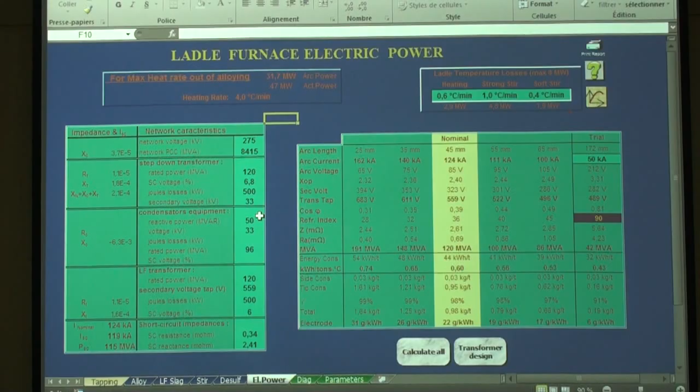Okay. So you have got the point, yeah? We put 4 degrees per minute, and then we get the arc power. Yeah? According to the formula, heat rate plus temperature losses, times tons, times the kilowatt hours per degree and per ton, and divided by the arc efficiency.

And from the arc power to the active power, we have it from the nominal values, but in this case it's not typical because we have just allowed 45 millimeter arc length from the slag, so it's too slow. So usually 47 is too much, yeah? Because with 120 kiloamps, the ohm losses and the voltage drop are too high.

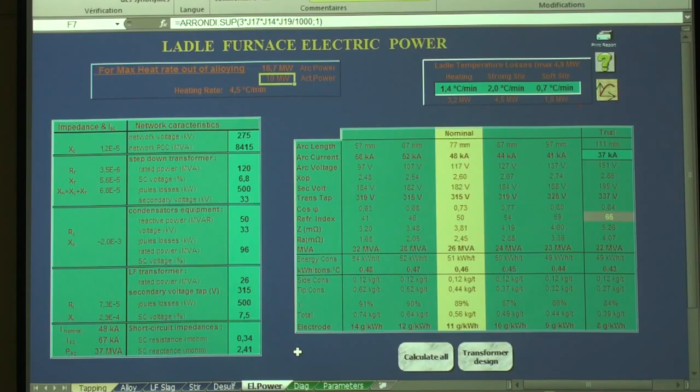How about sulfur? Sulfur is calculated here. This is 6 ppm? No, this is in percent, so it's 60 ppm, I guess, huh? If we want the desulfurization under 10 ppm, you have to start with the lower. You cannot tap at 30, yeah? Okay.

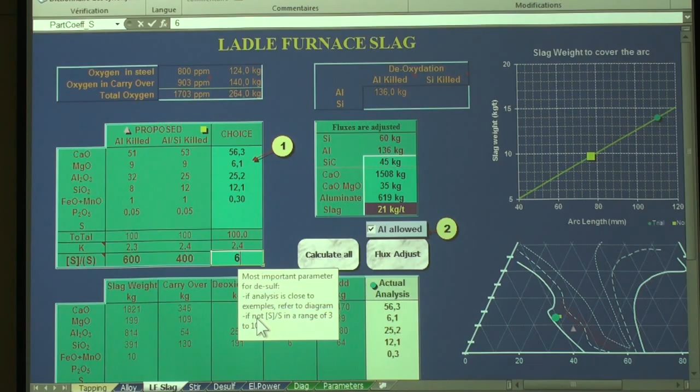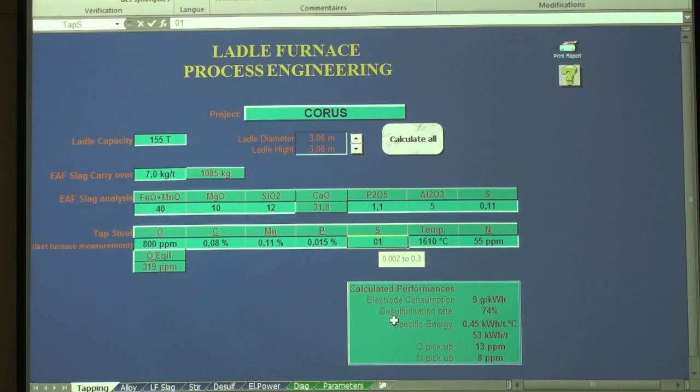And we can still increase the desulfurization. Maybe the slag. We can have a better partition coefficient. It's difficult to get down. 30, we still have 30 ppm. But we have here already 74%. Let's say the maximum we can achieve is 80% desulfurization. So you have to decrease the tapping sulfur. But below is difficult to be so precise. That's right.

So, I mean, the desulfurization rate is calculated here. And this you can find in the literature. Okay, then we'll try it next time.

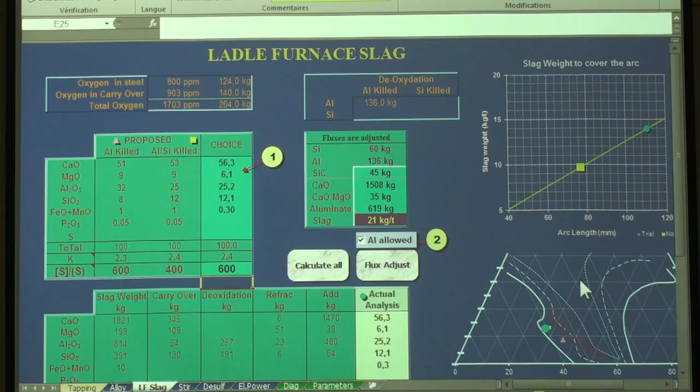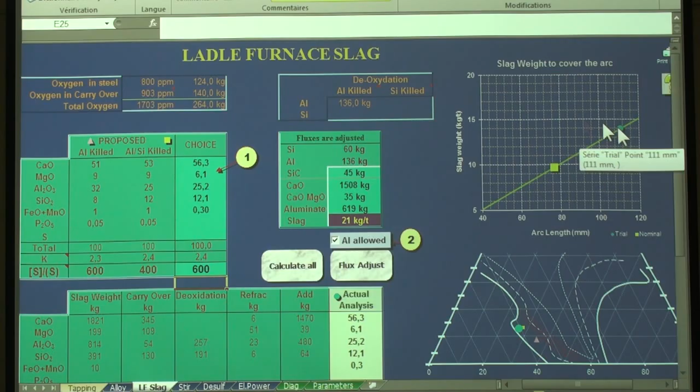The same formula everywhere. So as well, we have quite a lot of slag, so it's helping the desulfurization. It's more than about 100 millimeter thickness of the slag when we decrease the sulfurization ratio. We are 110, yeah? 110 millimeter slag. Yeah, it is a property like CaO plus.

So target temperature is the liquidus plus the superheating, and the superheating is a parameter. This is required by the caster. And of course, this is designed for the standard, let's say, ladle in circulation. If you have a new ladle, it should be higher. As I say, the temperature drop during tapping is 60 degrees C. This is also a parameter.

40 or 50? 60? 40. Yeah, this is worst case. Okay. It's a small size. Maybe.

And here you have the composition of all the fluxes and alloys. The pitch circle diameter is calculated. It's given? No, pitch circle diameter 658 millimeter. It's calculated from this electrode diameter.

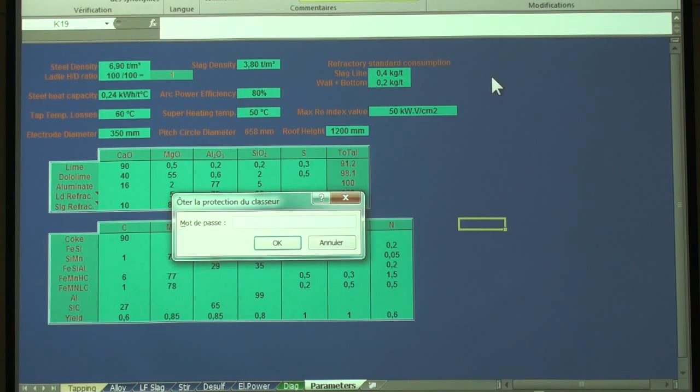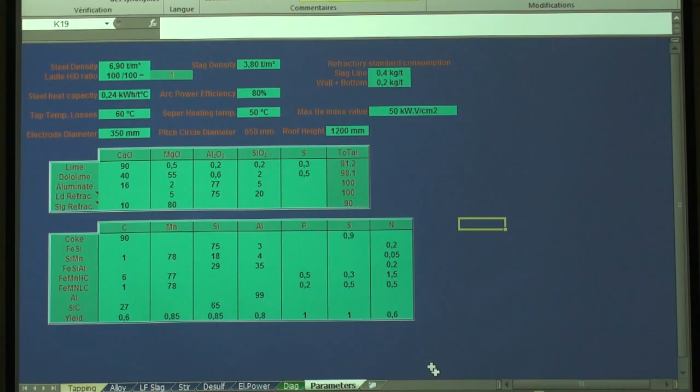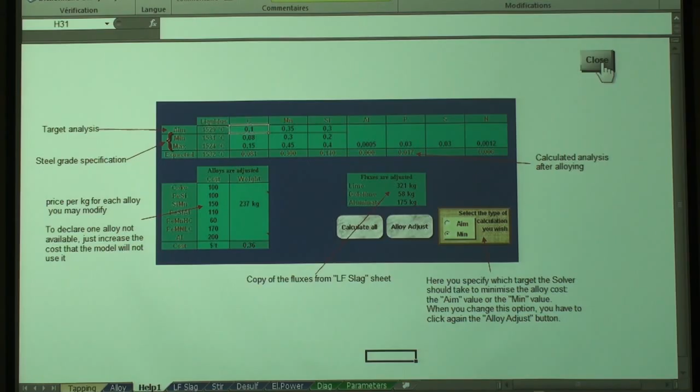So each time you have a help data sheet, then you can have some explanation. Yeah. For all of them. See, EAF model. Then you have the process diagram.

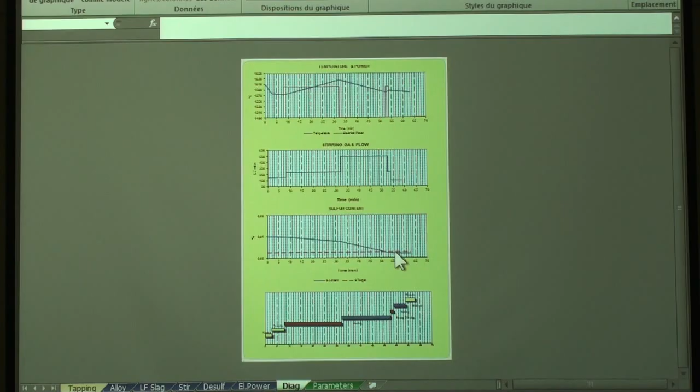With the temperature evolution, the power on time here, the stirring flow rate, with the tapping, heating, desulfurization, heating and soft stirring. The sulfur content, and the schedule. I can increase. You can see better, and the schedule.

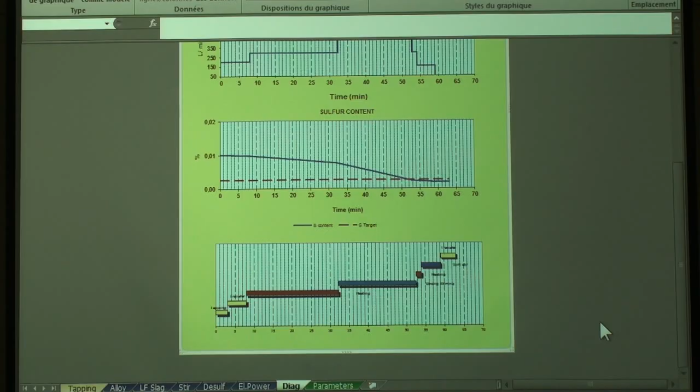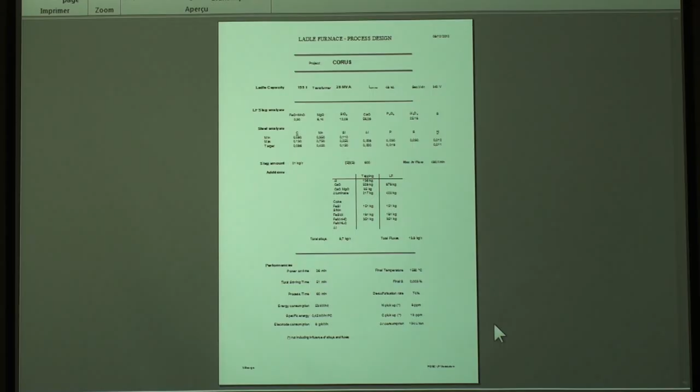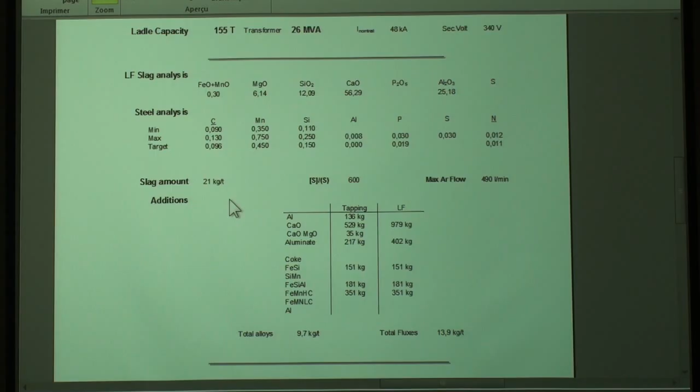And if you want to have the report, you have here all the data, the main figures. With the alloys during tapping and LF. And the performance. You see, I even calculate the nitrogen pickup and the carbon pickup.

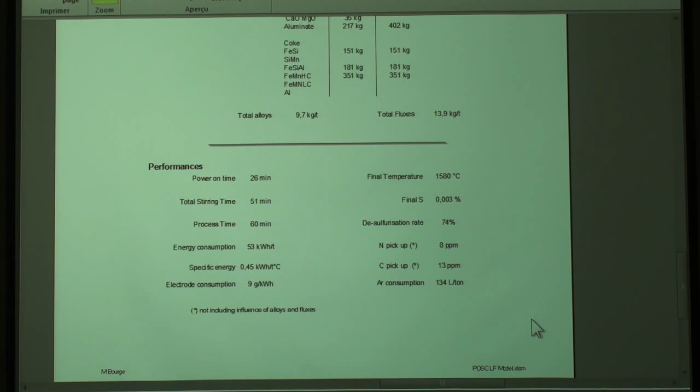Degree per minute. It depends on the ladle size, right? Yes. So also let us have some data for that one. But it's not calculated, yeah. Yes, yes, I know that. But you have experience, your own experience.

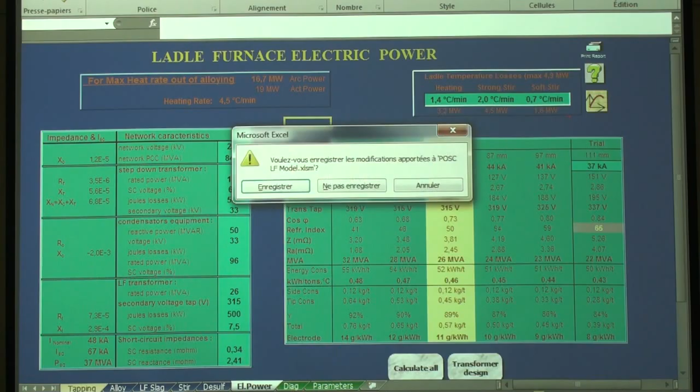Okay, let's go into the EAF heat profile. EAF heat profile. What? Earth? Yes, profile. You have some section of the heat. EAF profile. Yes. Process diagram. What is heat profile? No, I don't have. This is Mr. Ehle's specialty. Yeah, detailed things we will learn from him, but you have it.

Pre-study before the specialist. No. I prefer to leave it to Mr. Ehle, definitely. Really. So, but, yeah. You just have to wait until January, yeah? It's not a long time. No, we have one more problem. In my schedule, I have to report to my boss. I report briefly, so please explain it briefly. And then Mr. Ehle comes here. Oh, it's your first time, we'll say.

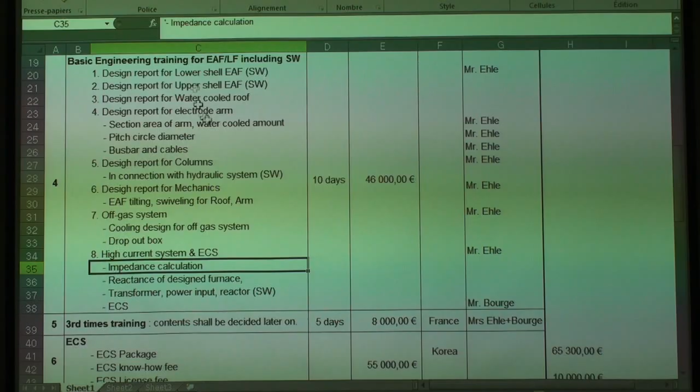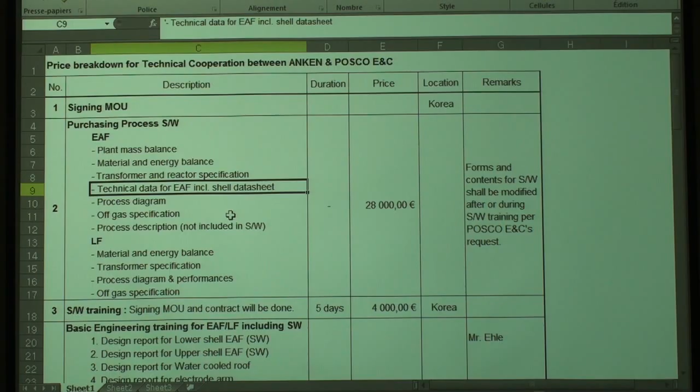I report to my boss. So this is the profile, how to do it, and I can explain to him. So I have to know how to make it briefly. Today I don't understand what the problem is. I have to report to my boss. In this meeting, I make a target, my goal. Inside of my goal, I have the profile. Really? Yeah. So please understand me. This one here. Yes. Please understand. Okay, this is just to make your boss happy, but then forget everything I will tell you. Yeah. Okay. Don't worry.